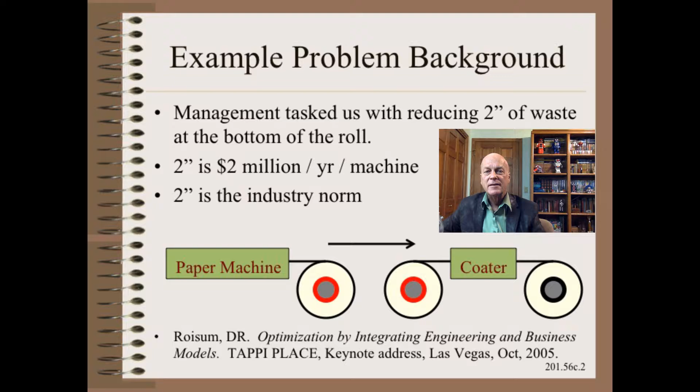Those familiar with the paper industry know that 2 inches is about the industry norm for most grades and most machines of this type. To complete the bigger picture, the jumbo rolls made on the paper machine would next go to an offline coater. Paper coaters can be quite fussy. Fussiness can also be the case with other webs and other web machines and other web customers.

While reducing waste may seem quite reasonable, there are many problems with this assignment. First, reducing waste itself is trivial. It is merely a setting on the next unwind. There must be something standing in the way, otherwise this paper mill and every other paper mill would have done it already. As I teach in my problem-solving classes, the number one problem is number one for very good reasons, and you had better truly understand what those reasons are.

One of those reasons is that waste is also a good thing. As we will see, it protects the downstream customer from even worse troubles. Thus, to assume waste is purely bad is a crippling oversight. This is why some popular management programs, such as Zero Defects, can be economic nonsense. They do not consider that waste can be, and quite likely is, a good thing too. Waste in moderation can protect you from even worse troubles.

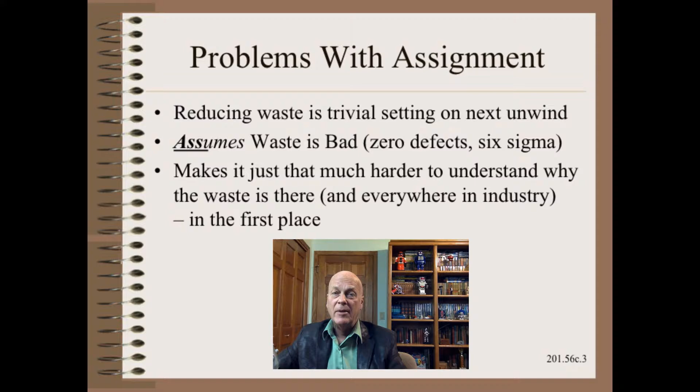These and many other limitations with popular management programs will just make it that much harder to understand the problem and thus make good economic choices. So first, let us acknowledge that there is a kernel of truth to the waste is bad myth. Here it is trivial to cost core waste as a function of the variable to study. In this case, the amount left on the core or spool. In the paper industry, it is very approximately $1 million per inch per year per machine.

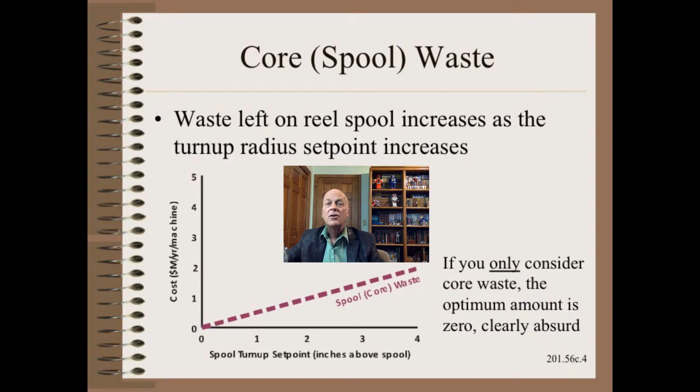So, if all you considered was the badness of waste, you would come to the conclusion that the optimum amount of waste is 0. This is clearly an absurd answer because no one in the paper industry is running at 0. There are reasons why, and you will never understand the system unless you also consider with equal weight the goodness of waste.

As any operator will tell you, running the unwind down to the last wrap on this kind of machine is not only a bad idea, it won't work at all. The reason is simple. The material is damaged near the core. We learn why this material may be damaged by the winder and the unwind in my Web 101 classes, and sometimes it is due to unavoidable factors such as gravity. The outcome of this case is predictable: more web breaks and other issues near the core.

Thus, to understand the system and make the wisest economic choices for settings, we need to understand the goodness of waste near the core. Here, we can do an extended trial of different diameter settings for the turnup and tabulate waste. If a typical value is 2 inches, we may also try 1 inch, and then 3 inches. Additionally, as we saw in the last clip, we may get another data point for free.

That is, the cost curve must be concave upward, going to infinity on one side. You simply can't run zero waste on this kind of machine. Web break rate is easily converted to dollars. The worth of this machine is approximately $20,000 per hour, and a web break on this machine takes the machine down for about 1/2 hour. Thus, a single web break on this machine will cost about $10,000.

Note, however, that the true cost may actually be higher than these simple estimates because this machine, a coater, does not immediately reach equilibrium when it starts up. So the first half hour after start is more risky for waste and delay. Finally, note that if you are in the converting industry, your rates may be 1/10 of that discussed here, but the principles are identical. In any case, we fit a curve to those 4 data points, 2 being trials, 1 being normal operation, and 1 being free.

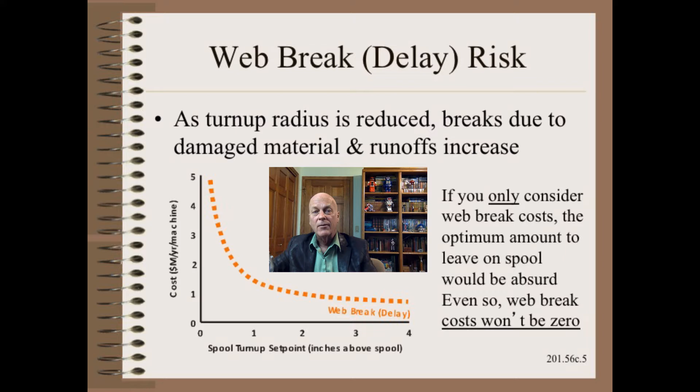We can now see the costs of running too close to the core. Note, however, that this curve will not go to 0, even with generous padding near the core. The reason is that there are other ways to have web breaks besides having damaged the material down near the core on the upstream winder or unwind. The asymptote is the base web break rate that does not have to do with damage near the core.

Now we can assemble the cost curves for both the goodness and the badness of core waste and sum the two. The total cost has a minimum, and that is the economic best for this situation. Interestingly, the analysis gave a minimum of about 1.4 inches instead of the more typical 2-inch practice. However, as you see, the curve is quite steep on the left side.

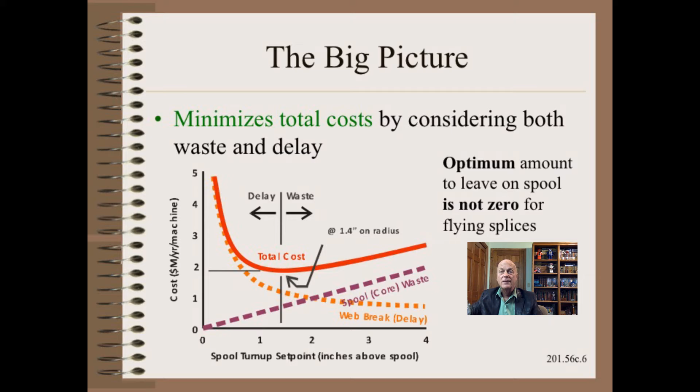That means that to be conservative, knowing the uncertainties of the study, you should bias your settings a bit towards the right. This is because it is much more flat to the right, in other words, safer. Thus, the optimum may well be the 2-inch norm that management told us is not good enough. None of this should be too surprising. All we have done is use economics instead of making assumptions and guessing to get the best answers.

We see trade-offs like this every single day. Internal rejection protects the end-use customer and thus ideally reduces claims. The same is true of trim removal. It also protects you from internal rejection and customer claims. Roll size is a trade-off between inefficiencies of small rolls versus waste at the top and the bottom due to damage from the winder or unwind caused by gravity and nips.

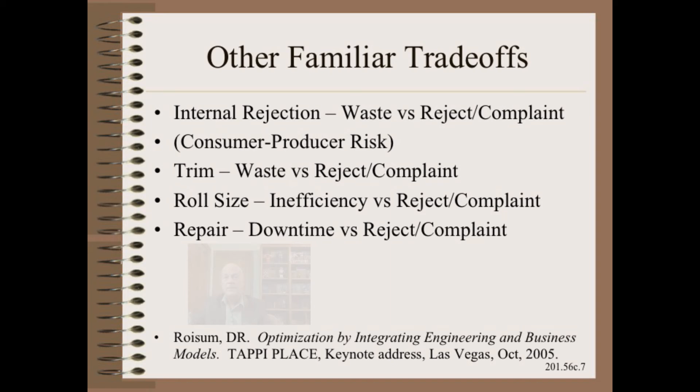Finally, when we take a machine down for repair, we are ideally trading downtime against even higher waste and customer complaints by running a limping machine. As we've seen, and as we come to expect, waste is both good and bad at the same time. However, to think that this example is about paper or coaters or flying splices or web breaks is to miss the big picture. These principles are nearly universal.

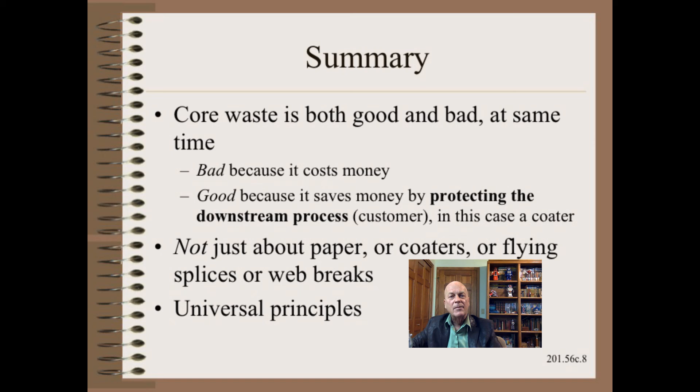And so, what do we do when best is not good enough? What do we do when the best in the industry is not good enough? Well, stay tuned. In episode 201.56f, we will answer that. In the meantime, we have a couple more examples and a couple more analysis tools to cover.